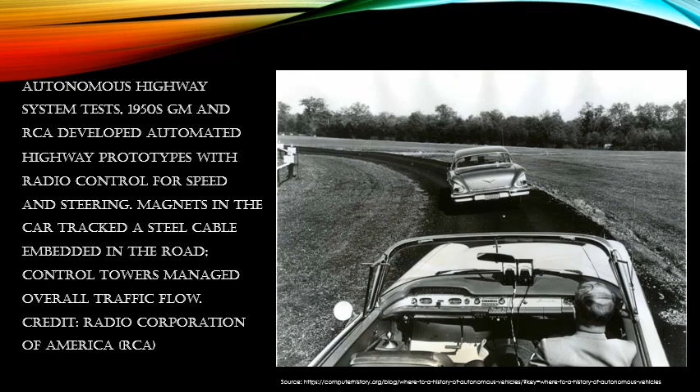One of the first examples of autonomy in a vehicle dates back to Greece, circa 60 AD. Carts were used to carry actors to and from stage. These carts used weights suspended from a rope to travel forward or backward a predetermined distance. The next development would occur roughly 1400 years later, when Leonardo da Vinci invented a stage cart that would also turn at a predefined distance.

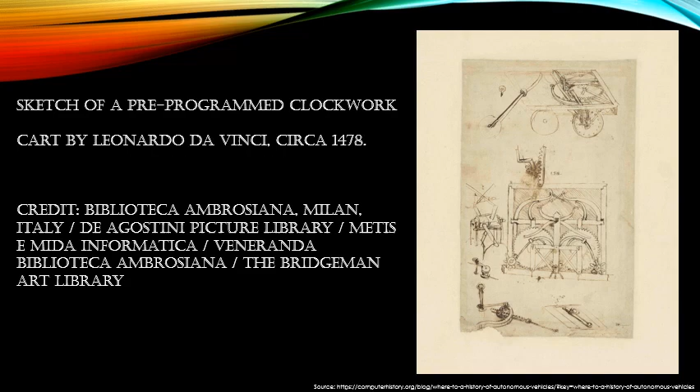Though it's accurate to say that the implementation of autonomous vehicles is very old, the idea predates the existence of the most rudimentary ones by several hundred years. In fact, the idea dates back nearly 3,000 years. However, the problem with autonomous vehicle development, as with nearly every field of human endeavor since the dawn of man, is that what we wish to do and what we know how to do seldom coincide. The technologies or ideas on how to implement it in innovative new ways often lags by years, if not centuries, and they are often reapplications of another technology.

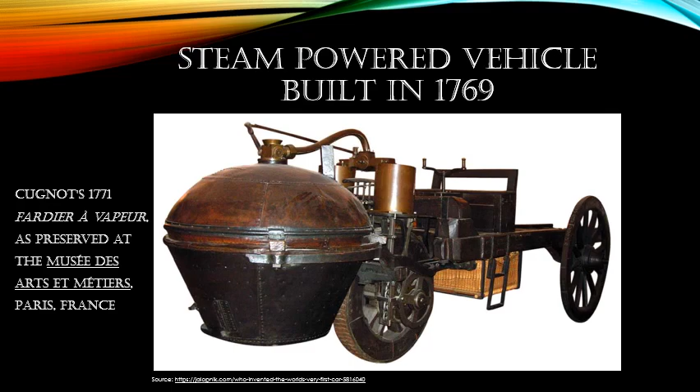An example of that, which relates to vehicles, is that the first car was developed as a steam-powered engine around 1769. And in fact, the first internal combustion engine was patented approximately 2 to 3 decades later, but it took nearly 100 years after that to develop an internal combustion-powered car. It then took an additional 60 or 70 years before cruise control was patented for the car. However, when the first steam locomotives were invented, they had a system similar to cruise control to govern wheel speed. Thus, the cruise control, which was patented in the middle of the 20th century and didn't become standard for several decades, was just a reapplication of an 18th century invention.

In fact, it's entirely possible that some of the solutions for future autonomous vehicle problems already exist in some other form and are merely awaiting repurposing. I'll give a couple of examples, which are not related to autonomous vehicles, but will illustrate how a thing is created and then much later a new purpose that was totally unforeseen occurs, which allows for a new advancement. Before I studied logistics, I studied to be a machinist.

One of the tools we used every day to measure parts is called a micrometer. For all of its complexity and utilitarian purpose, at its heart, it's just a nut and a bolt. About 2,200 years ago, Archimedes came up with the idea for the screw thread, which is the thread which makes a bolt into a bolt instead of just being a metal rod. Technically, the idea of the micrometer could have been hatched that same day and it would have worked.

Only he invented it to move water up an incline, and it took approximately another 1,900 years for it to find a purpose as a measuring tool. Only it was used to measure the focal size of celestial objects in a telescope. Great if you're an astronomer, but not much use otherwise. It wasn't repurposed for its current use for measuring parts for another 200 years.

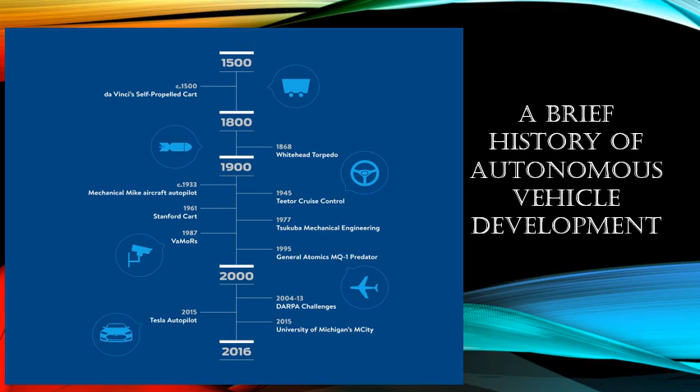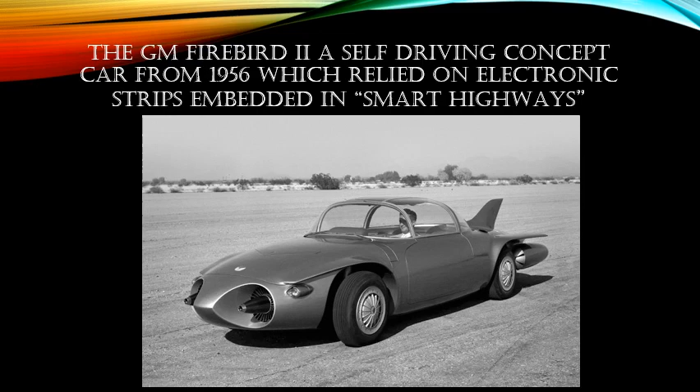The story of autonomous vehicles is replete with similar examples of one set of developments awaiting the rest of the technology to catch up. However, many ideas that are over half a century old have caught on or are catching on, even if not in the forms originally envisioned, such as the Firebird 2 concept car of 1956, which introduced many futuristic features, including what GM hoped would be part of the future of the automotive industry: self-driving cars that relied on a smart highway.

In fact, from the mid-1950s until as recently as the late 1970s or early 1980s, various projects were being pursued to create self-driving cars that utilized smart highways, which had embedded electric wires in them to send signals to cars driving on them. However, the idea failed to gain traction due to the cost and presumably the fact that it makes more sense once the technology was available to create cars that relied on their own technology rather than relying on special roads with strips embedded in them.

For one, the cost of the autonomous vehicle is not a collective cost, whereas a smart highway would require taxpayer funding. Thus, if individuals desire an autonomous vehicle, they purchase it, as opposed to municipalities, states, or the federal government having to find funding to convert to smart roads.

Whether we're talking about drones, autonomous cars, or ships, portions of the technology required for them to operate have existed for some time, but we're waiting for other portions to be invented, implemented, or converted to the required purposes.

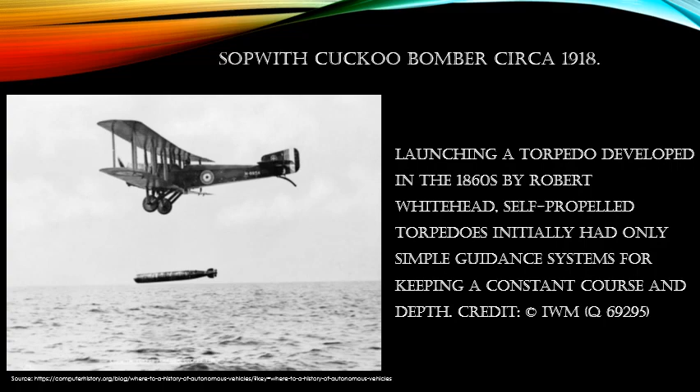Also, while much of what is mentioned in this presentation refers to autonomous cars, the technology to make a passenger vehicle autonomous versus a cargo vehicle autonomous, well, it's all the same thing. For the purposes of addressing autonomous vehicle usage in logistics, it is obviously necessary to develop technologies which often are used on light passenger vehicles before they're used on other vehicles.

For instance, for a tractor-trailer rig to be able to be platooned without a driver independently controlling each vehicle requires adaptive cruise control so that the truck can understand the gap and speed it needs to maintain. For that technology to exist, it required not only the invention of cruise control, but also the discovery of radio waves, the invention of radar and LiDAR, which uses light instead of radio waves. It also required the invention of various sensor arrays and the electronics and computer hardware to receive, interpret, and process the data about the driving environment.

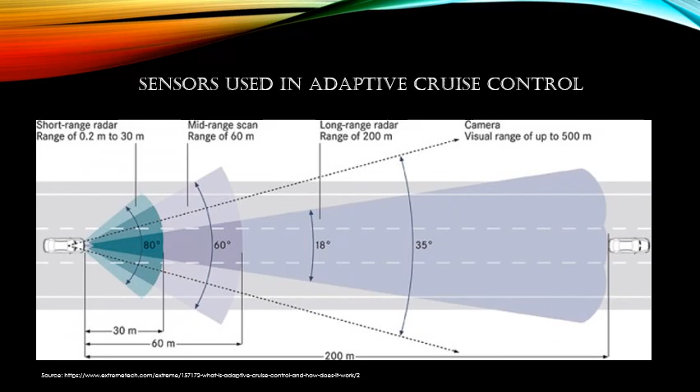Even after those technologies were invented, they had to be made small enough, rugged enough, and inexpensive enough to be placed in consumer vehicles. To put this into the proper perspective, Google has spent in excess of $1 billion developing autonomous cars. In fact, several car makers have spent comparable sums.

The original concept cars were part of a DARPA project, and they're the same people that invented the internet and the GPS, among other things. But the problem was, and still is, that the technology is prohibitively expensive.

In 2017, the cost to convert a light passenger vehicle to be autonomous was something like $250,000. And even then, it would only be self-driving under specific circumstances rather than all circumstances.

Mercedes is developing autonomous vehicles, and theirs disengage from autonomous mode about 700 or 800 times per 1,000 miles driven. Granted, Google has a better track record, but theirs also disengaged, albeit only about 70 times per 1,000 miles.

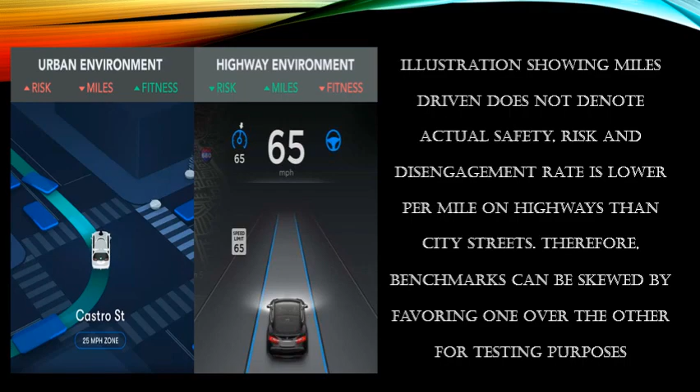What is important to note is that what most people expect and what some vehicle manufacturers are promising is a level 4 or level 5 autonomous vehicle. The problem is that level 5 autonomous vehicles are defined as ones that require no human aboard. Yet the very best autonomous vehicles today still require a human driver at least 70 times per 1,000 miles, and the rest require them even more frequently.

What we're mostly seeing are between levels 1 and 3 in autonomous vehicles, which are driver assist all the way up to limited control by the vehicle. For instance, the vehicles can maintain lanes and speeds or change speeds. They just can't do that inside of a city, and therefore require human drivers once they enter urban areas.

What we're seeing are issues where the programming for autonomous vehicles is not yet up to the task of reacting to chaotic environments such as busy urban streets filled with pedestrians and complicated traffic patterns, where vehicles are turning in front of the autonomous vehicle, merging into traffic with them, and doing other unexpected things.

It is not that the programming won't exist, or that it doesn't already to some degree exist now. It is more that it is not yet ready to assume 100% control of every mile driven.

Now, it's fair to point out that autonomous vehicles exist in logistics. In fact, many do, but they exist almost exclusively in controlled environments. For instance, Caterpillar has produced a series of autonomous heavy dump trucks for the mining industry. In fact, one Australian company is using nearly 200 of them now. But that environment is much more controlled than a city street or even an interstate.

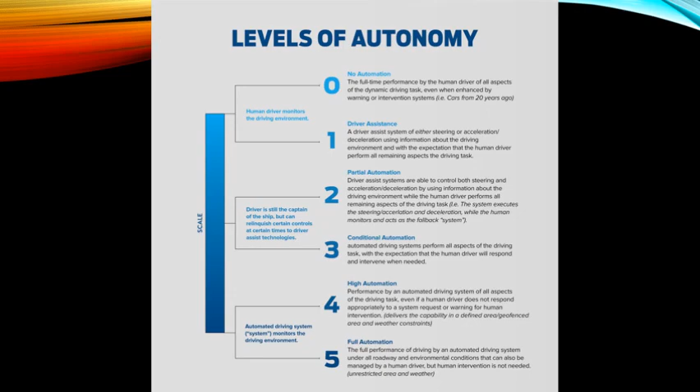Experts estimate that autonomous vehicles won't have much market penetration until after 2030, and likely not until as much as a couple of decades later. A portion of that is directly attributable to several things.

First, there's very little, if any, standardization regarding autonomous vehicles, and as such, their performance is not uniform, meaning that some companies have vehicles that perform better in autonomous tests than others. Therefore, until there is more standardization, this is problematic.

It is the same issue that the fledgling personal computer industry saw, where buying one brand instead of another led to technical issues because parts, cabling, and programming was all proprietary. Meaning if you picked the wrong one, you could have problems that were difficult if not impossible to remedy, and the same could easily be true of buying the first autonomous vehicles if the technology for the brand purchased is found to be inferior.

Second, both Tesla and Uber have experienced fatalities using vehicles in autonomous mode. Yet statistically, 2 fatalities in strictly human-driven cars would have required nearly 200 million miles driven. Yet the combined total of all autonomous car testing in real-world driving is less than 5% of that figure. Before either regulators or the public are going to trust level 5 autonomous driving, it should require considerably more testing than has occurred thus far.

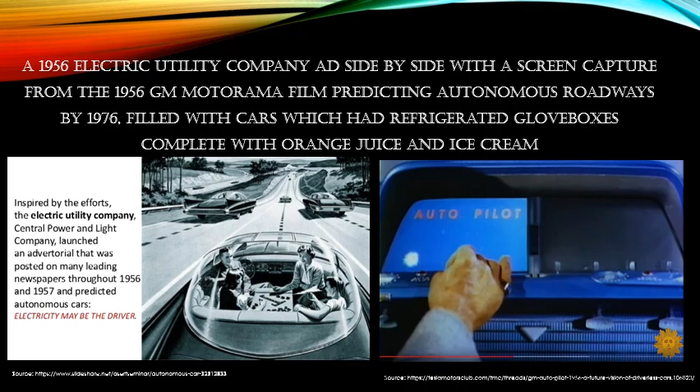For one, there's much still to be done, and what once took centuries or decades to invent or innovate now takes years instead. But that doesn't negate the fact that some of the programming and computing needs have yet to be met. However, this brings up an intriguing point.

Autonomous vehicles generate vast amounts of data very rapidly. In order to handle this data and to achieve the necessary throughput of it, that will require a great many advancements in computers and computer science.

The advances required to handle the bandwidth required for that data, the computational requirements, and other aspects will undoubtedly have a ripple effect throughout the rest of the economy and technological sectors of various markets.

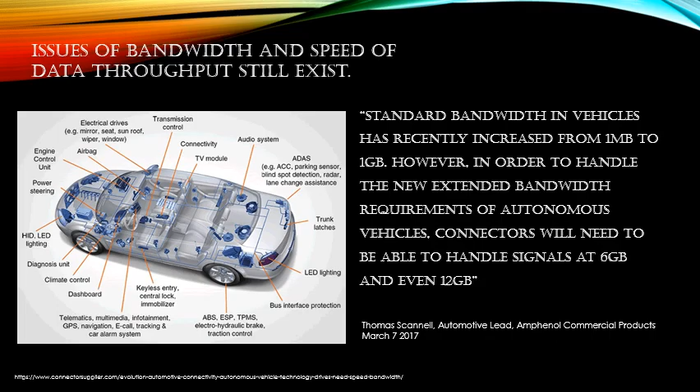Additionally, many of the projects being tested or conceptualized are intriguing in their possible applications. Some have great potential, including possibilities that have yet to even be discussed or considered, with many possibilities outside of merely logistical applications. For instance, Boeing has been developing what might be considered a heavy lift electric drone.

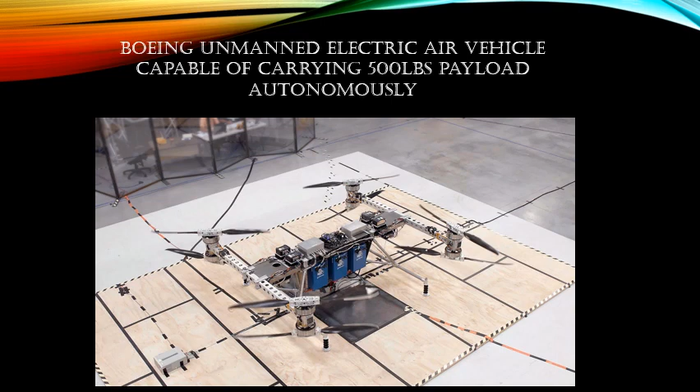By regular aircraft standards, it's nothing special because it can only carry a payload of between a quarter and a half ton, and only for about 20 or so miles.

However, it's not difficult to imagine these drones being used to resupply ships which could not otherwise anchor, or to resupply remote islands without the requirement of the ship stopping.

For example, Pitcairn Island in the Pacific requires freighters to bring them mail, drop off supplies, and pick up or drop off trade goods, while the ships sometimes take on supplies of fresh fruits or fish while anchored offshore.

However, by using drones with a range of dozens of miles, it would be possible for the ship and the island to exchange a pair of drones that are loaded with cargo, all without the ship being forced to stop, slow down, or come closer than a dozen miles from shore.

Furthermore, drones such as those could deliver emergency medical supplies to areas that have experienced a natural disaster, or even carry small generators to areas without power, such as Puerto Rico after the storms last year.

Moreover, a drone of that type of lift capacity could effect seaborne rescues if required, or perform a multitude of useful functions that would otherwise require a helicopter and a crew along with a much larger landing area. Thus, the drone could lessen the manpower and resources required to perform several important functions.

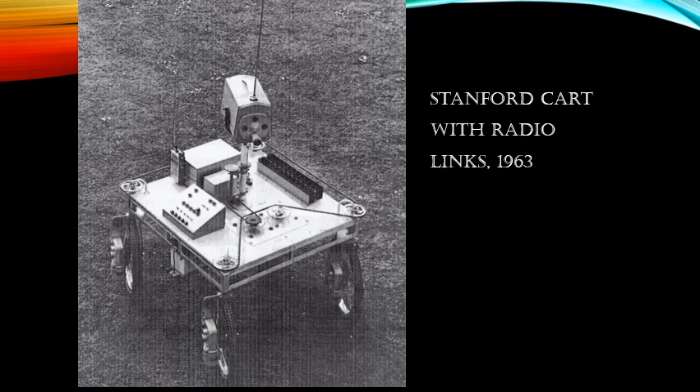In fact, one of the major impetus behind some of the initial autonomous vehicle research revolved around questions of how an autonomous rover might react during the first manned and unmanned lunar missions. Research was ongoing at Stanford University from about 1960 to 1986, which resulted in a great deal of practical solutions and innovation regarding autonomous vehicles.

Given the constraints of the operating environments involved and the ability to utilize autonomous vehicles to extract resources, explore, or transport materials and personnel on the lunar surface, on Mars, or even in Antarctica, that could prove invaluable, especially in regards to the logistical support they could offer. Anything that would help automate a lunar base could prove worthwhile and perhaps fiscally attractive as opposed to being forced to send humans to perform missions that autonomous vehicles could perform equally well.

However, as with anything, there are a few ideas that are questionable at best and possibly harebrained or exceedingly dangerous at worst. An example of that is a recent interest shown by scientists and at least one company into the area of utilizing autonomous zeppelins which use hydrogen gas to remain buoyant. The upside, if it works, is that they envision these zeppelins carrying 20,000 tons of cargo. The downside is that they envision using hydrogen gas for buoyancy, which is extremely combustible. Their answer to the safety concerns is to make them operate autonomously.